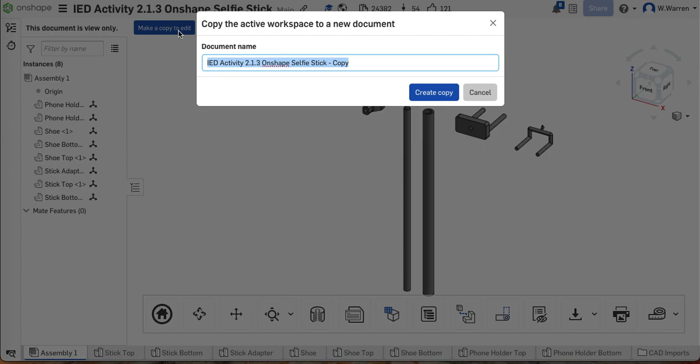So the first thing I'm going to do is go to this Onshape link, and I am logged into Onshape, so it should give me the opportunity to just make a copy. This is not my work, I didn't draw this, this is from PLTW. This document is view only - make a copy to edit. So I'm just going to call it Onshape Selfie Stick and create a copy.

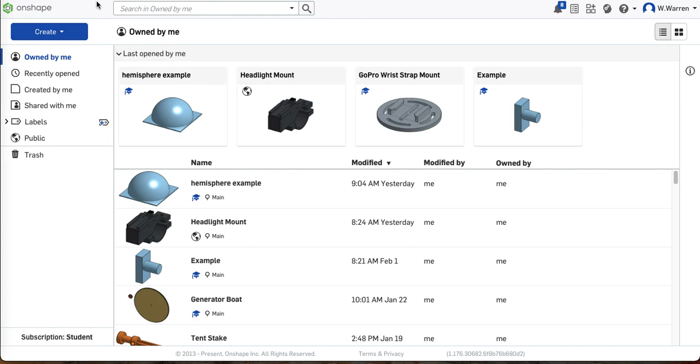Now when I go to my Onshape, I will have my own copy to mess with. Let me click out of here and go right to my Onshape. Looks like I should refresh. And there it is - I'm going to click on my Onshape Selfie Stick, and you'll see that I have all the parts right here.

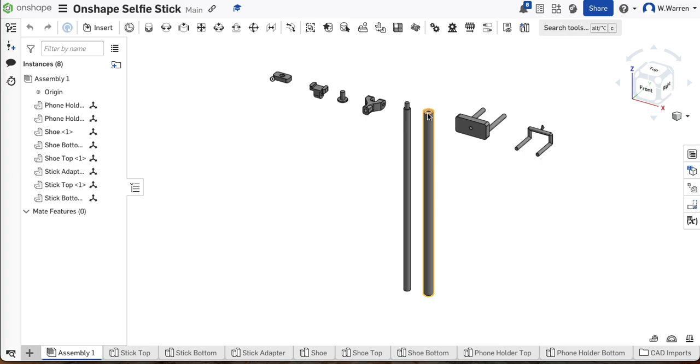Now the challenge here is to assemble these parts, stick them together, but in ways so they function properly. Selfie sticks have arms that extend so you can put it farther or closer. So that's going to go in here, but it's going to be able to slide, and we'll have to set limits so it doesn't pop out or go all the way through. This slides too - that's what holds the phone. That slides inside of that. And then this guy rotates around a screw that we need to go get, and this fits into there.

That rotates as well. Okay, so we're going to mess with this in just a minute, but let's go back to Google Classroom. And if you click here, I just copied this number right there, this part number. So I'm going to go to McMaster-Carr and just put that part number right here.

Thumb screw, 2-arm - that's the one. Plastic head, so it's the one that I searched up - plastic head thumb screw, 2-arm, 10-32 thread, 1 inch long. Right, we're not going to buy it, we're just going to download a 3D step model. I think step is what we want. Yeah, 3D step - you may have to change that. Here's my default to SolidWorks, but change that to 3D step and download it.

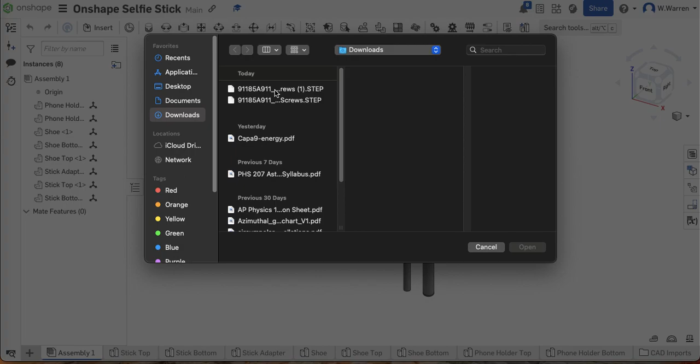Okay, now I just downloaded it - to where? To my computer, but I need it in Onshape. So I'm going to go back to Onshape. I need it here, so what I want to do is go insert new tab, and I want to import - import something in my download folder, this step screw right here. And I'm going to open it up and just keep the defaults what they are.

And I have now updated. I go to CAD imports, and usually, let's see here - let's just see if we can find it. There it is right there, that's the step file. Let's go back to home, all tabs. Yeah, there's the plastic head screw right here.

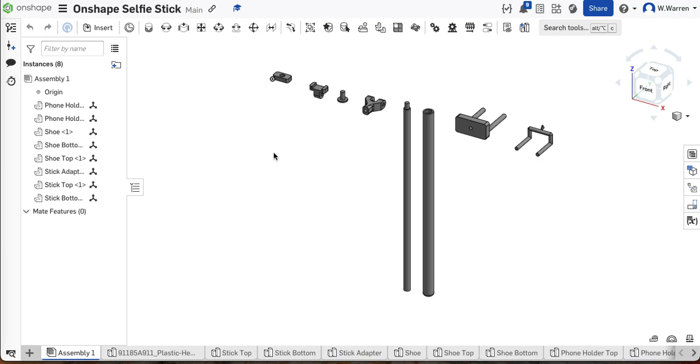So it shows up, and so now we need to go to our assembly file, because that's where we need the screw. So let's insert that screw and the rest we have here. And there it is.

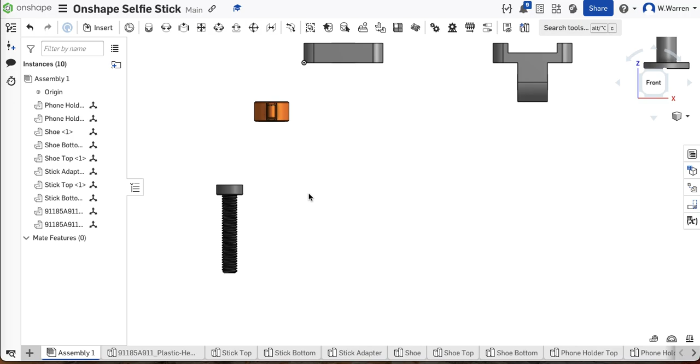Now I was fiddling with this earlier and I noticed this - look, the plastic head is not attached to the screw. I mean, it's part of it, but it's not really attached. So let's start with our mating right there. We want those two to be permanently attached as though they're epoxied together or fastened in some permanent fashion. So these are your fastened mates up here.

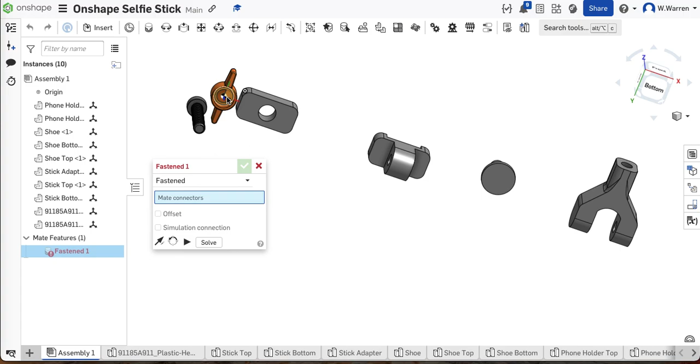You can fasten, you can revolute mate, you can slide mate - those are the 3 we're going to be using today. But let's go ahead and stick these 2 things together by choosing fasten. That removes all degrees of freedom, that's like epoxy. I'm going to choose the inside of that center, and I want to mate that to the top of that screw. I like to get close to make sure I choose the center right there.

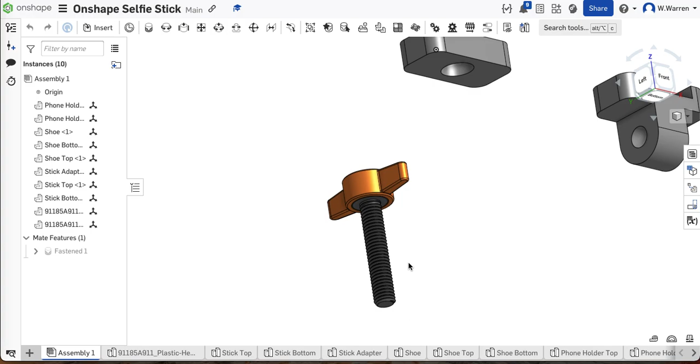And then I press OK and close that out, and it should be good to go, meaning if I grab it and drag it, it should all come together as though it's been glued together. So we just fixed that - that came unglued, but now it's glued.

Okay, well here's our selfie stick, and we need to take a look here. Oh, check this out. This is the phone holder.

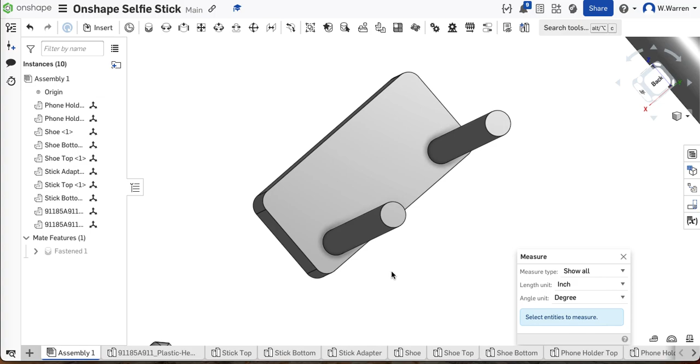And these things here have a 1/4 inch diameter, but there's no holes there though, right? So these have to fit inside of those to slide back and forth to grab the phone. And these are solid, and they better be less than a 1/4 inch diameter. So that there is, yeah, 0.2.

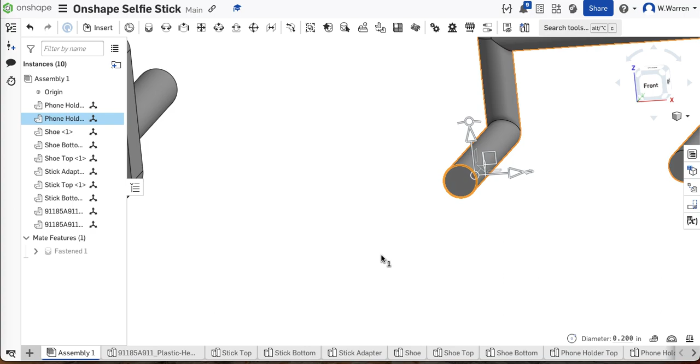So let's go, we have to fix something here. Let's go to this part here. Is that the shoe phone holder top? No, it must be phone holder bottom. That's the one. Let's go to that piece, because these need holes in them, right?

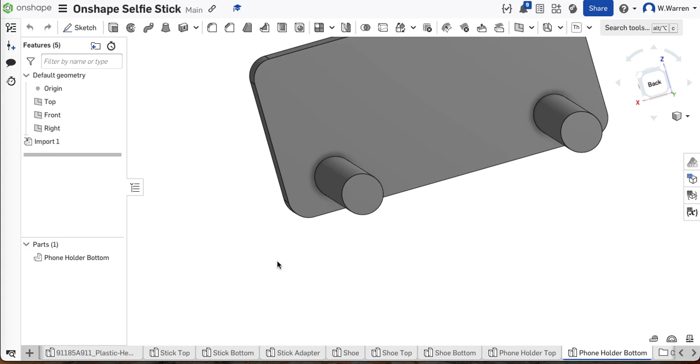That needs a hole. It's a 1/4 inch across. The piece was 0.2, so let's go with about a 0.21 hole. So let's look right at it.

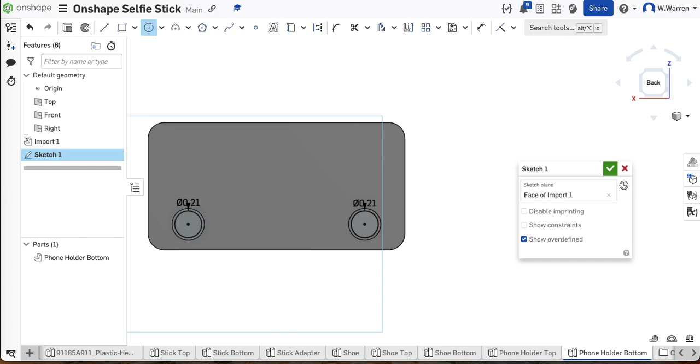Let's draw on this surface, sketch, and just do a hole 0.21. Right, so center hole, 0.21 inches, enter, and I'm going to do it to this side while I'm here. 0.21, same thing on both sides, enter, and let's go ahead and extrude those.

And we want to remove material, and we're going to pull it down nearly to the bottom. We won't have to go that far, but let's go just down close to the bottom. I'm at about 1.9 inches here.

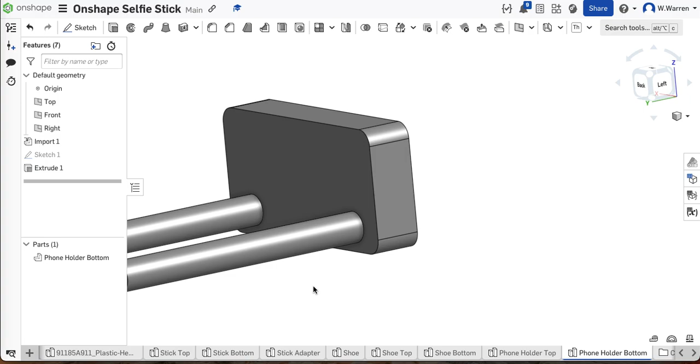And so now we've got holes in there, and that'll propagate to our assembly file, which is here. Yeah, see, now that has holes in it. So these will fit into there.

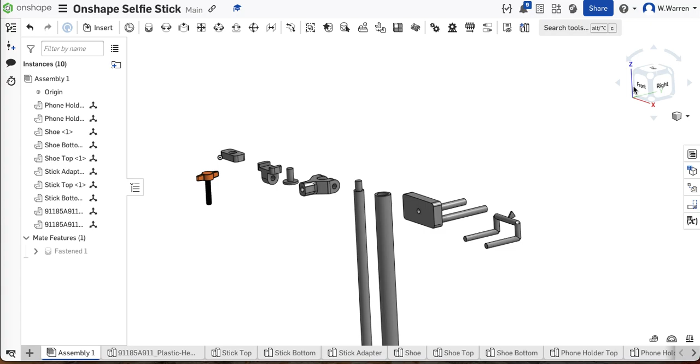Okay, let's start with, gosh, I don't know. Let's just start with the stick. So I think I'm going to straighten this up a little bit just so I don't get too confused here. I'm going to bring this over here and this guy too. I'm going to have all these parts over here on the left. You can do whatever makes sense to you. I'm just going to drag these over here.

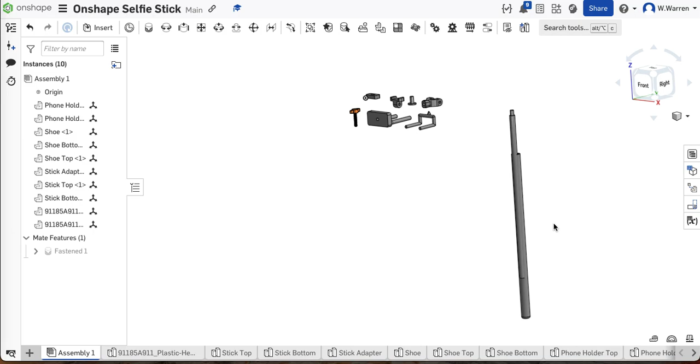And basically this stick goes inside of this one. It can slide up and down so the selfie stick gets longer or shorter. But not just by eye. We want to mate them together so it's done properly.

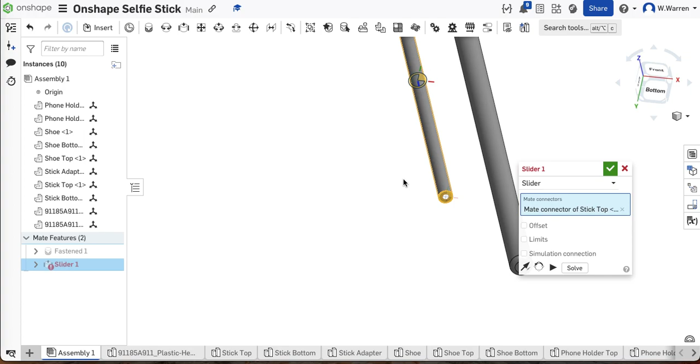Right, so let's go ahead and just go up and choose slider mate, and let's put this bottom dead center. Let's put that into this hole here. So what I've just done is, or what I'm about to do, I've just mated those together.

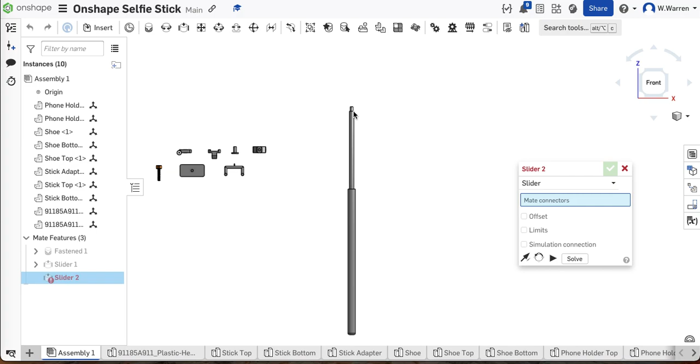Now check this out. It's a good start, but I'm not quite there, and you'll see why in a second. So this slides up and down. But if I move it side to side, the whole thing goes. So that's good.

The problem is this. Oh, it comes right out. Or it goes all the way down into it and down out the back. So what we need to do is set limits. So let me get rid of that and go back to the slide mate and edit it and set limits.

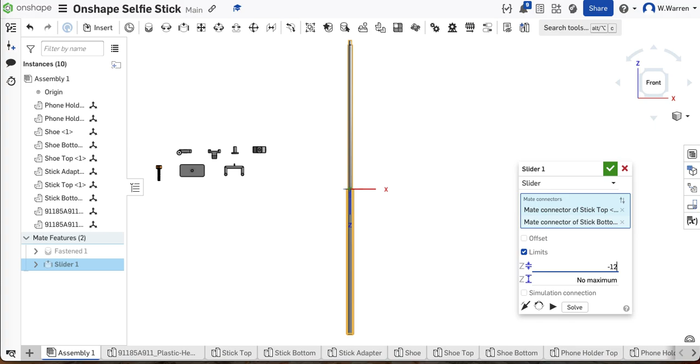Minimum. So let's go, I put it at the top. So let's go down 12. Let's see, down 12 and then no farther than the top. So 0. Let's see if that works.

I may have it backwards. Let's see what happens here. So, yeah, I do have it backwards. So it's not going into the thing now. Let's just fix that here.

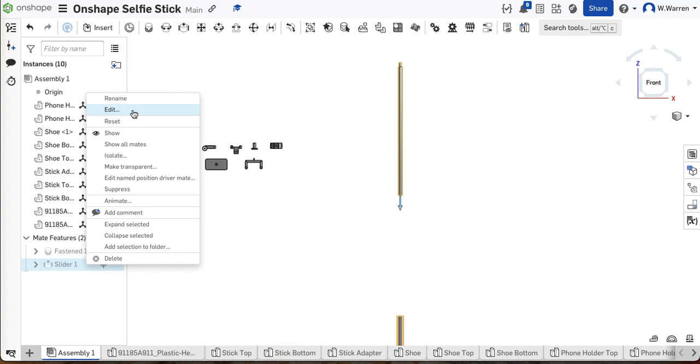Slider mate, edit. Let's go with 0. You might have to fiddle with this depending on what you chose when you did the mate. Maximum. Oh, that's going to be a positive 12. That has to be bigger than minimum, right? And let's see if that worked.

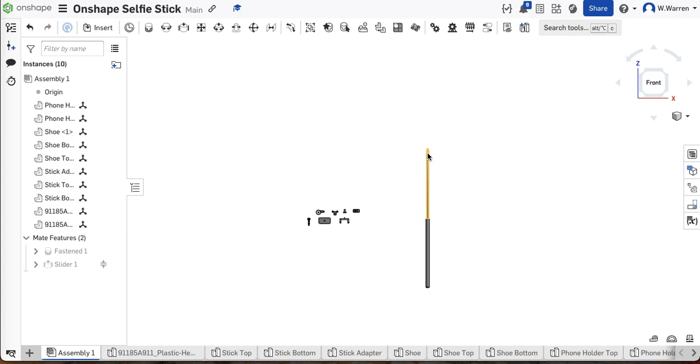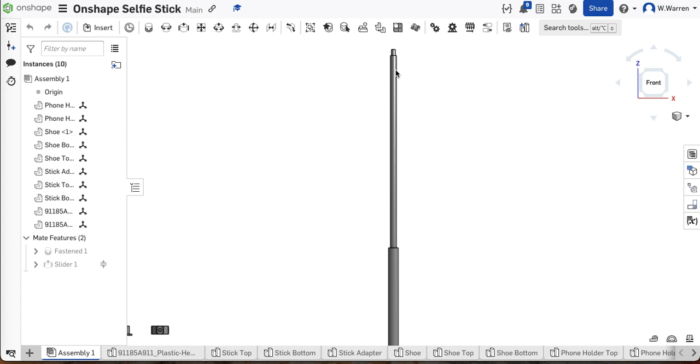Yeah, there we go. So now it won't come out, but it still slides down and it goes that far. Yeah, so that's perfect. Right, so now I've got the selfie stick rod, the stick part itself, and it can slide down, but it won't keep going past that point, and it can slide up, but it doesn't pull apart. It gets to some maximum 12 inches. Okay, that's a good start.

Let's go ahead and just maybe bring this thing down here so it's close to our work. And we will now go back to here and I look at this PDF and it shows me how to assemble it.

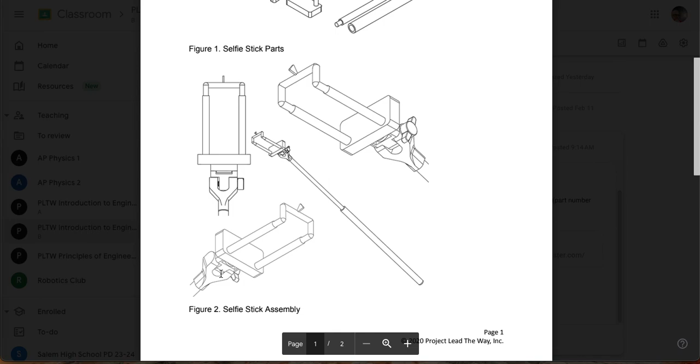Okay, so here's the assembly. I need the selfie stick to go to that Y adapter, and the Y adapter goes to that thingamabobber there. And it looks like that. It's a little bit offset to the side. That's the thumb screw there, and that's the phone grabber. So here we go, I think we're good to go.

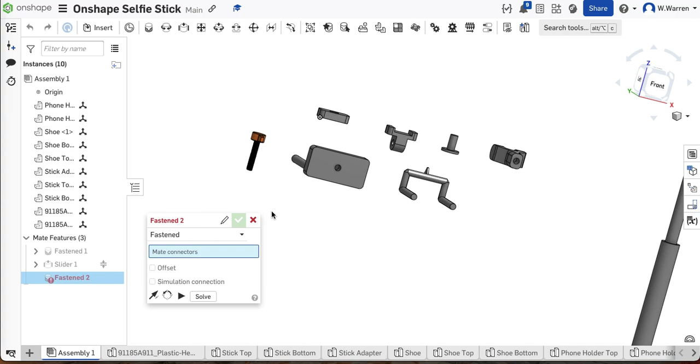Let me think. We need this to be permanent, so let's fasten this. This is that Y looking part. Let's fasten the interior there, the interior center. Let's fasten that.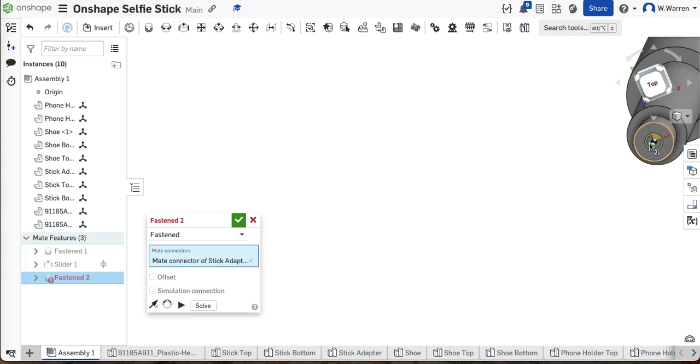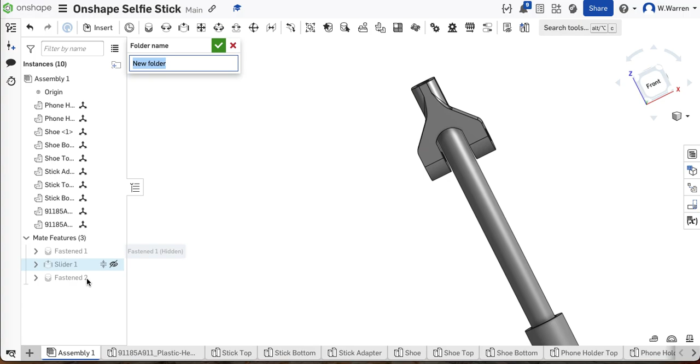It's right there, and press OK. And it's exactly upside down. So that didn't work. I was trying to take a shortcut. Undo, let's just delete that fasten. I was hoping it would orient itself properly. Didn't I just undo that? Fasten, delete.

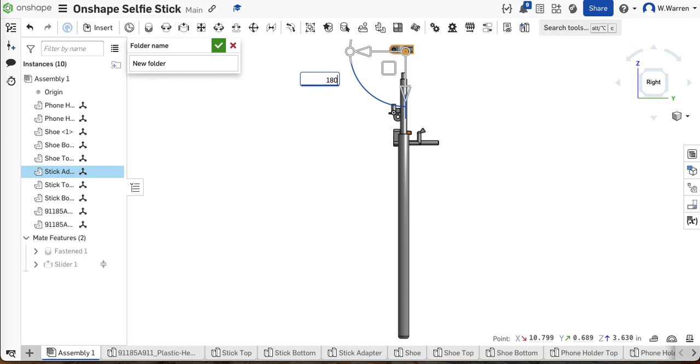So sometimes it'll flip into the right orientation, sometimes you've got to put them in the right orientation first. I'm sure there's a rhyme or reason but I don't quite know what it is. So if you orient it first, let's just rotate this thing 180 so it's in the right orientation. And we'll do that same thing again. Fasten, I'll look right at it. Fasten.

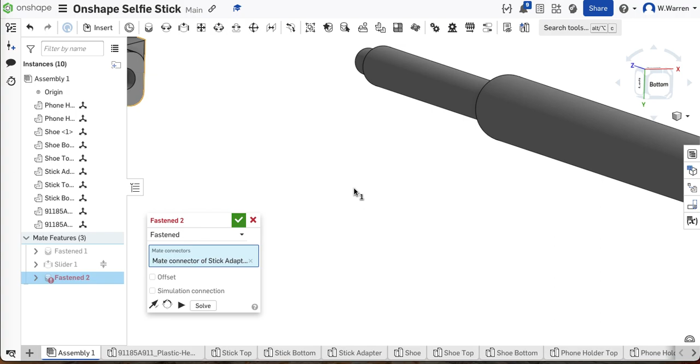I think I got where I wanted to get. Let's see, and I want to fasten that to here. And that looks better. There we go, that looks better. Okay, so now let's see what happens next.

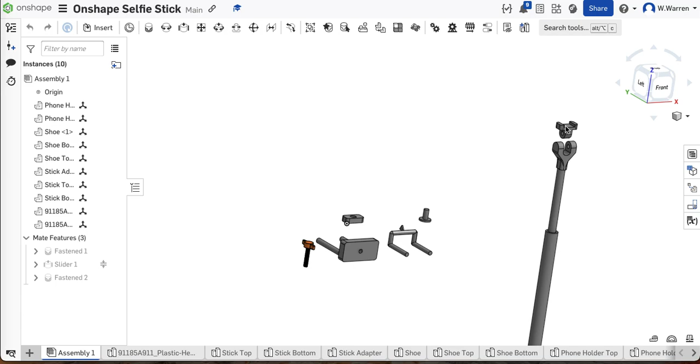This guy here, turn off fasten mate. We don't want to fasten this. This guy here goes right in here. I just looked at the picture a minute ago, right? And that's got to rotate, so let's get it kind of lined up first.

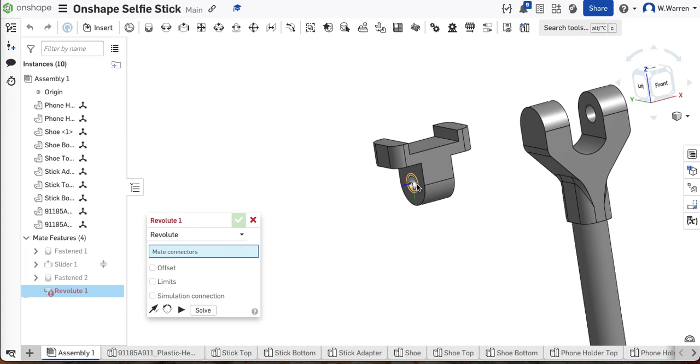So what we're going to do now is I always zoom in to make sure I can see what I'm doing well. And let's go find the revolute mate, and let's make that center of that outer circle rotation mate with that circle there, and see if that goes. And let's go check to see if it's good. I think it is, but let's take a look by clicking, get rid of revolute, click on the part, and then let's see if we can rotate it.

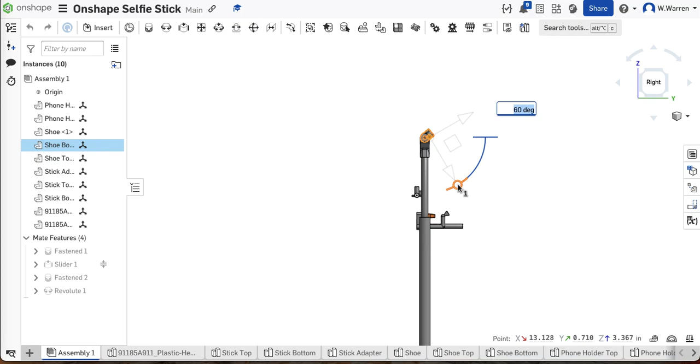Yeah, so I'll zoom in for you. See if the part rotates without the rest of it rotating, and it does. So that's good to go. That part right there is working like we want it to.

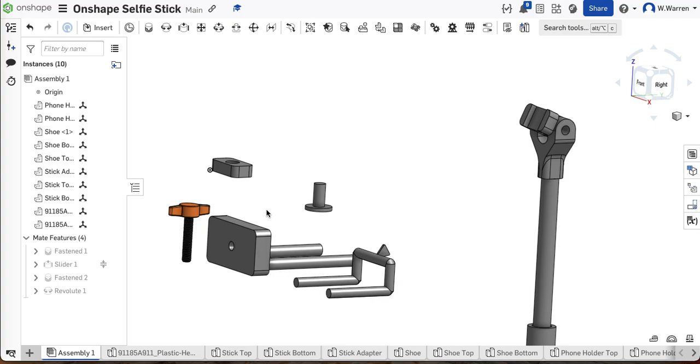So I'll click out of there, and we need to insert this screw. Let's get the screw about where we want it, and again in the right orientation. Sometimes the orientation works out, sometimes it doesn't. But I'm going to click on that, I'm going to rotate it by 90 this way. And I'm going to then get it close-ish, bring it over here. And what do I want to do?

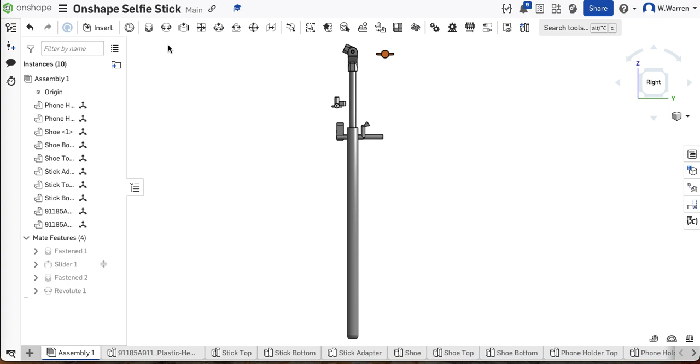I also want a rotation mate. I want to be able to turn that screw head. So revolute mate, and I think what I'm going to do is that surface, I think I'm going to do that surface right there.

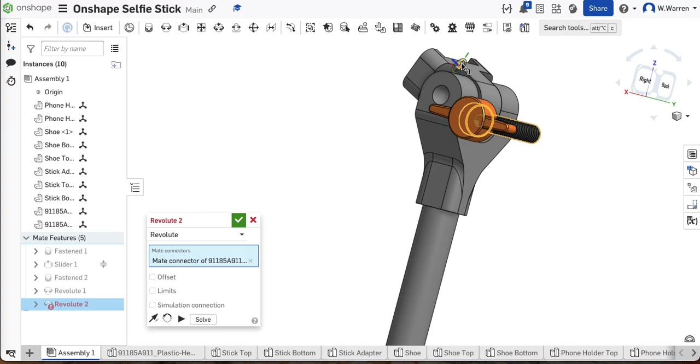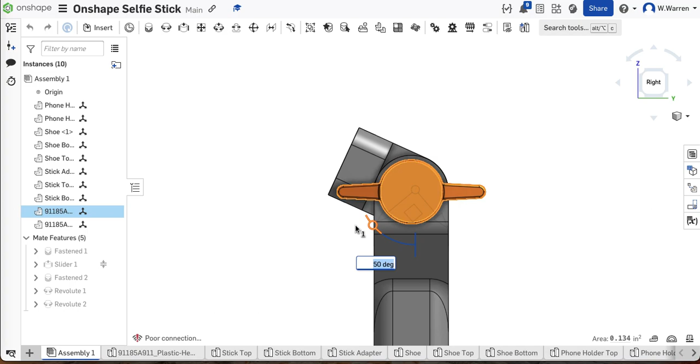Did that work? Let's see. Yeah, that seems to have worked, so that's in place now. Okay, and again, you can check it to see if it works by zooming in, kill the revolute mate, and then choose the thing and see if you can rotate it without rotating other things. And that works just fine. Okay good, now we're getting there.

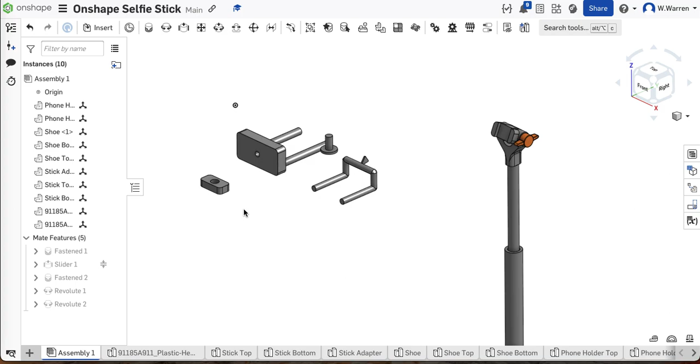We're getting there, and now let us find those other parts. There they are. This is a little connector piece. That little connector piece goes right here. And let me get the orientation right. So this piece we've got to rotate

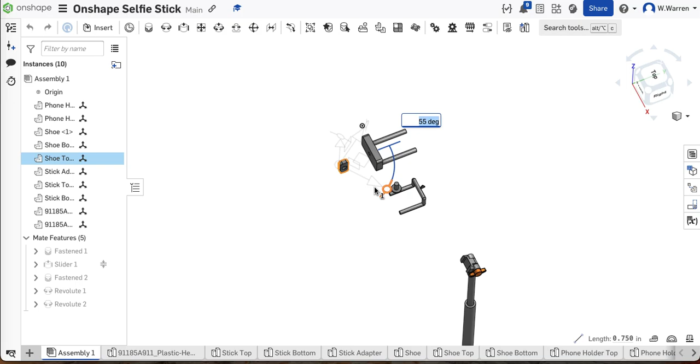90 this way. We've also got to rotate it. Wait, do I have that right? Yeah, and we also have to rotate it this way 90. So it's lined up like that.

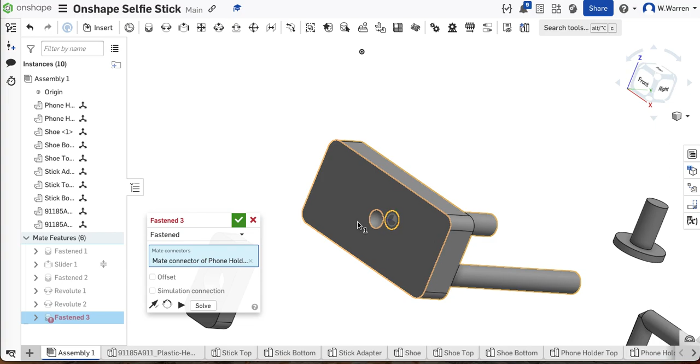Okay, so now I'm going to, that really does get glued, so fasten. I just want to go hole center to hole center, so center of that hole. Oh, that's going to sink into the surface. I chose the deep, I went too deep. It's going to mate the surface of this to the inside of that, and the whole thing's going to disappear. So wait, let me get rid of that and try again.

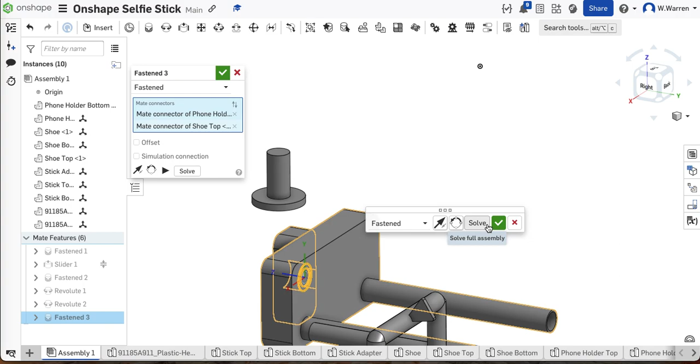Fasten, I want to be on the surface here. That's better. And then the surface of that hole, and click it, and let's see how we did. We did great. Now there's a little plug that fits in there.

This little plug fits in there, and I'm going to put it in the right orientation first. I'm going to turn off the fasten mate, I'm going to drag this over, and I'm going to put it in the right orientation by rotating it by 90, by rotating it by 90.

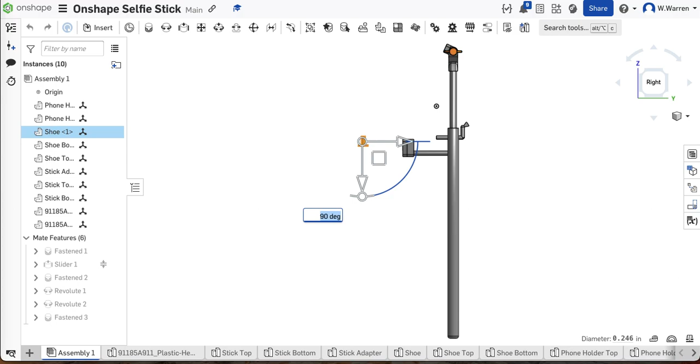And then I'm ready to fasten it into that hole. I think what I'll do is something similar. I think I'm just going to do that face to the outer portion of that hole. Fasten it in there. Good.

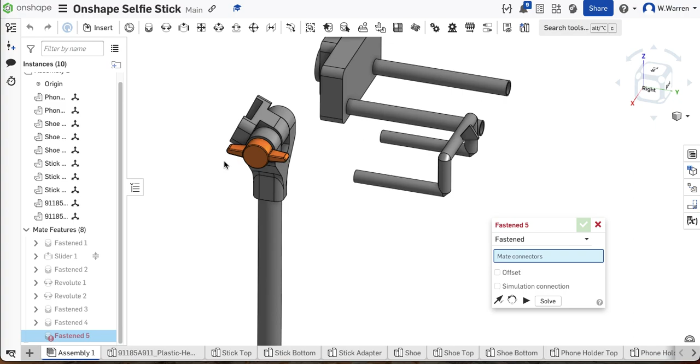And now this, let's see where we're at here. Let's get this guy together. So now we need a slide mate. So get rid of the fastened. Now we need a slide mate. We need these two to slide together.

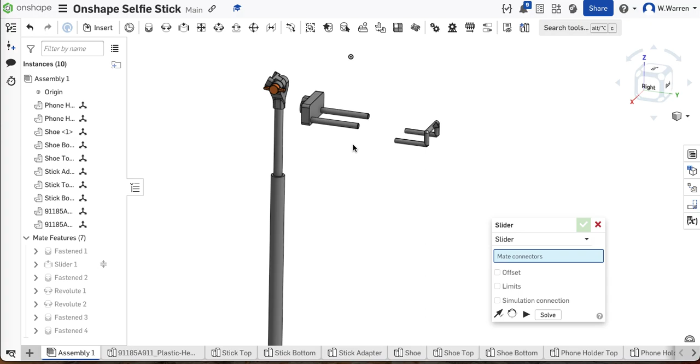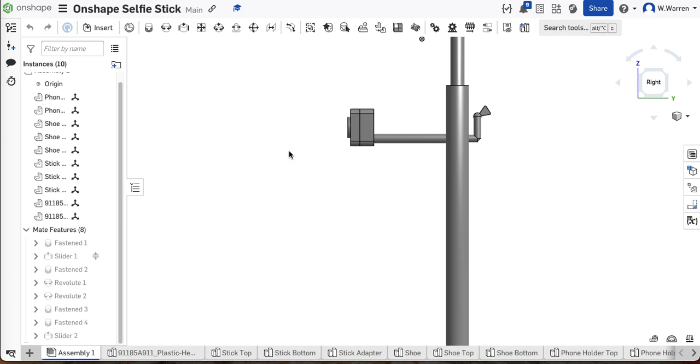So let us now grab the slider mate, and I'm going to zoom in, and I want to slide mate that to the center of that, and hit OK. I'm going to have to put limits on this, but let us just check it first. So now I'm looking right at this thing and move that out of my way. Let's see how it slides. Yeah, it goes too far.

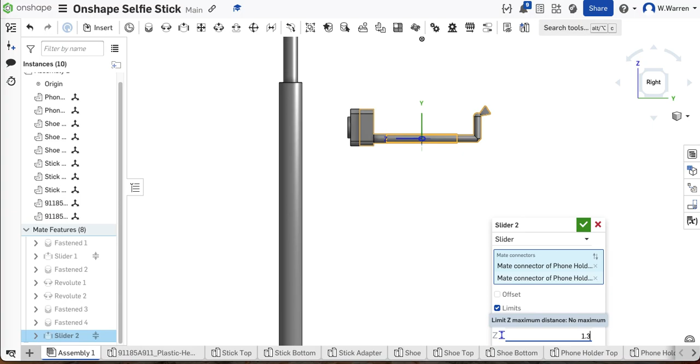That's okay, we can fix that. Let's go with, so down to the slide mate, edit it, limits. Let's do its minimum as 0 and its maximum as 1.4 or 1.35 or something. And we may have to fiddle with that. Let's see what happens here.

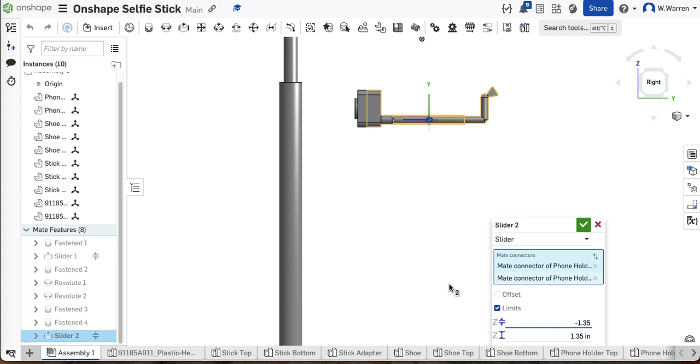Yeah, so not quite right. Let's go back to slider, edit. Let's go minimum as negative 1.35 and maximum of 0. You have to fiddle with this stuff to get it right. Oh, close.

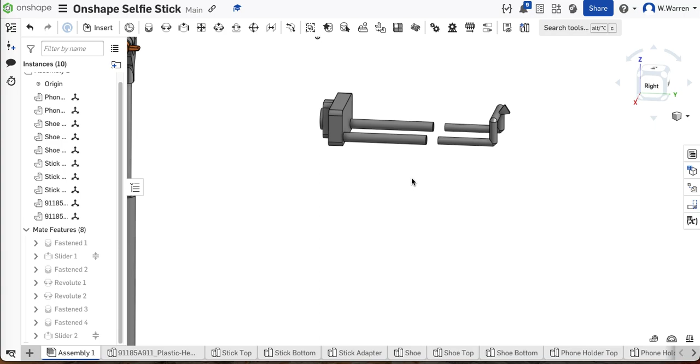So maximum, a little curious here. It's all about the initial mate and the placement of the thing during the initial mate, and that determines how big the limits have to be.

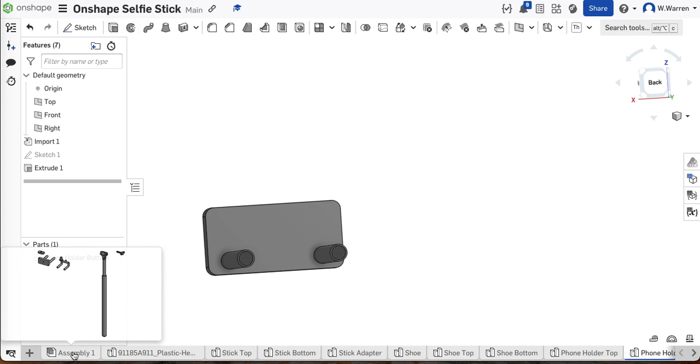Z, let's just try, let's see, -1. That's closer, right? And so let's just go -0.75. You're going to have to fiddle with this. Yours may or may not be the same unless you, depending on if you press the same constraint geometries that I did. So slider mate and negative maybe 0.9, -0.9.

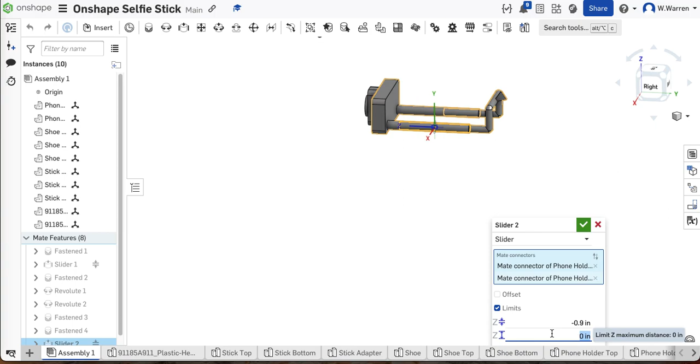And that's good, doesn't go in quite as far as I want it to. So let's go with setting the slider, edit, 0.9, and let's make this a little bit bigger, maybe 1. So it goes that far, and then it goes, 1 was a little bit too much. My goodness. So edit one last time here.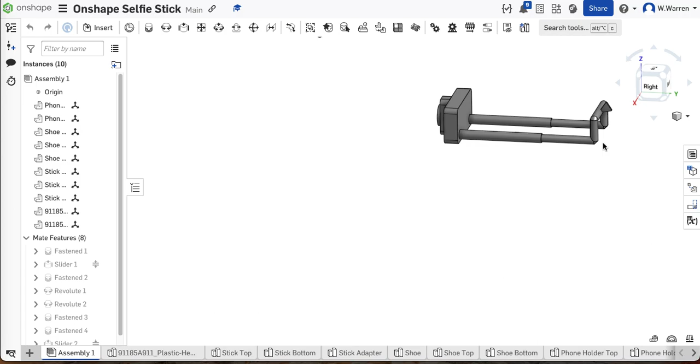I bet we'll get it. Maybe 1 inch. Maybe instead of that, we'll do 0.5. See how that works out for us. And that's pretty good, you know, it's going in a little bit too far. Look at that. So I'm going to be a stickler here, and I'm going to change that to, instead of 0.5, maybe 0.45. Again, your numbers will be different.

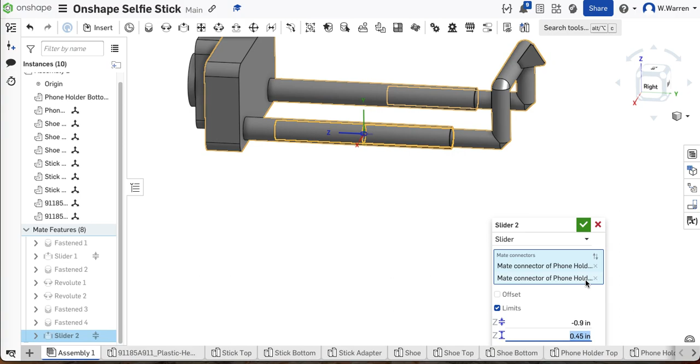You have to fiddle like I'm fiddling. It depends what you choose at the beginning. Yeah, that's good. So it'll only go that far that way, and it'll go that far that way. And let's finish this up. So I think we're really close here.

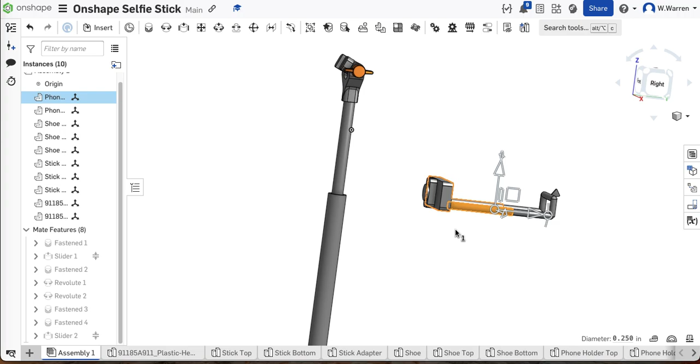All we have to do now is let's just grab this whole assembly here, sub-assembly really. Let's grab the sub-assembly and rotate it 180 this way. And maybe even just tilt a little bit this way, since I'm seeing that's tilted, just to get it in the rough orientation.

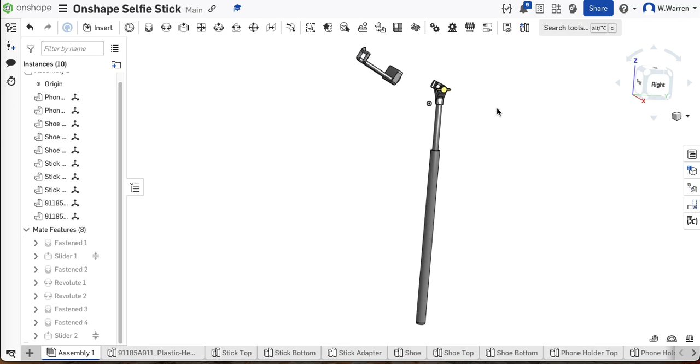And this is going to be, that's going to click in over here. We're going to hear a bell soon. I got to finish this up real fast here.

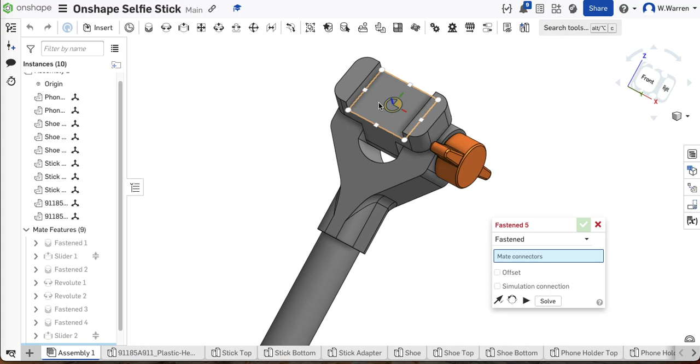Now we need to permanently mate those two together. So we just go to the fasten mate. I get here and I go dead center, and I come back out and I orbit around and I go to that little thing dead center, and I click on it, and let's see, it looks like we have a fully assembled and constrained selfie stick. Yeah, so that's good to go, right?

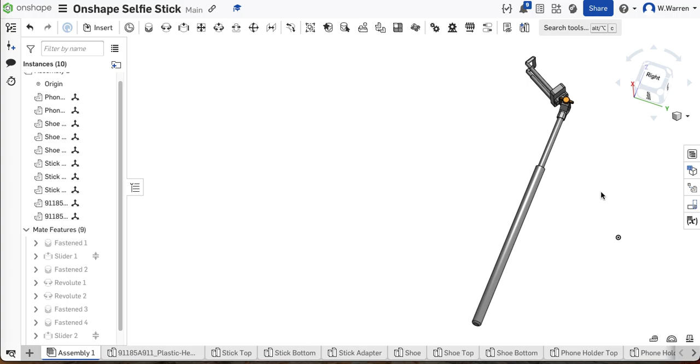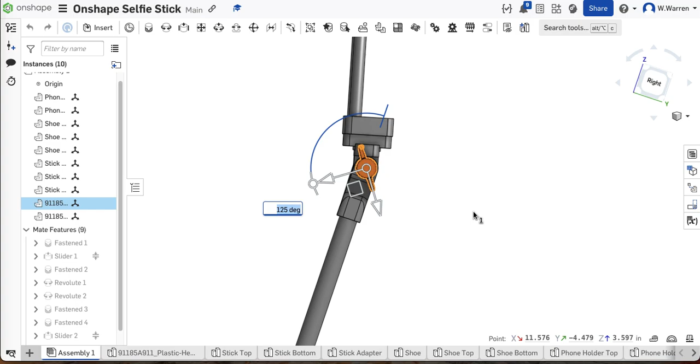And you'll notice if I grab this part right here, the part that rotates, if I click on that, I can rotate the whole thing. Just the top part, the part that holds the phone, rotates. If I want to rotate this nut, the hand bolt here, I can rotate that. If I want to slide it, make it longer, I can slide it, but only up to some maximum. If I want to slide it and make it shorter, I can slide it, but only down to some minimum. And so this is all done properly.

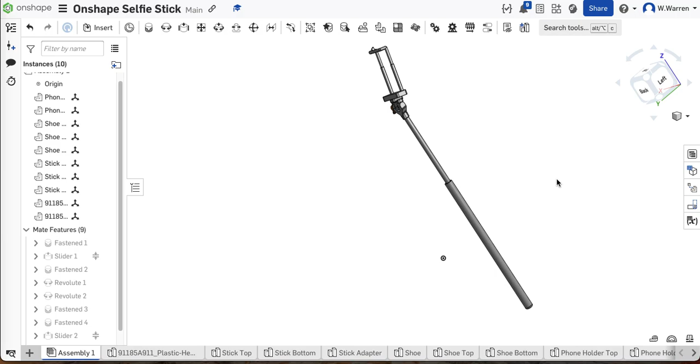It's fully constrained. Kind of a long video, sorry about that, but it's complicated stuff, and you just got to spend the time in the saddle. It's like anything good, you want to learn it, you got to spend the time and just bump it up against it, right? It's a little bit tricky. It's not hard, it's more tricky than difficult. And you just have to persevere and get to it, and you'll have this.